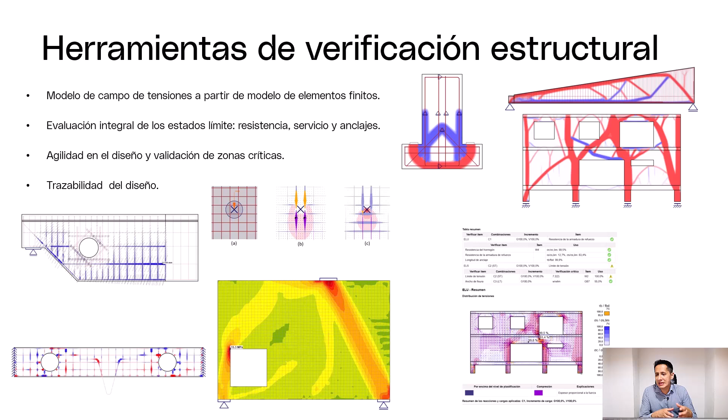Y bueno, en cuanto a la trazabilidad del diseño o la trazabilidad técnica, gracias a la representación más fiel del comportamiento estructural que estamos realizando, se podría incluso reducir el uso innecesario de acero, porque no sería tan conservador, por llamarlo de alguna manera. Podríamos mejorar la eficiencia constructiva y documentar cada verificación con los informes exportables que se van generando.

Y ya para cerrar mi parte, les presento esta tabla resumen en el cual compila todos los principales retos técnicos, los problemas comunes que enfrentamos en el diseño del prefabricado y cómo herramientas como IDEA StatiCa nos permiten resolver de forma precisa y alineada con la normativa.

En primer lugar, lo que habíamos comentado con respecto al tema de geometría, uno de los primeros problemas más comunes estaría relacionado al sobredimensionamiento, por ejemplo, o quizás a los errores no detectados por la falta de un modelo preciso. Mientras que con soluciones como IDEA StatiCa vamos a poder modelizar sin tener en cuenta estas limitaciones, y vamos a poder modelizar específicamente y validarlo con la normativa.

Por otro lado, otro punto importante tiene que ver con las condiciones de cargas especiales. Un problema común a presentarse es la subestimación de esfuerzos intermedios que permite riesgo de fisuraciones o fallos incluso dentro de los montajes. En cambio, con el software vamos a poder realizar un análisis más detallado por fases, con representación precisa de las cargas en general.

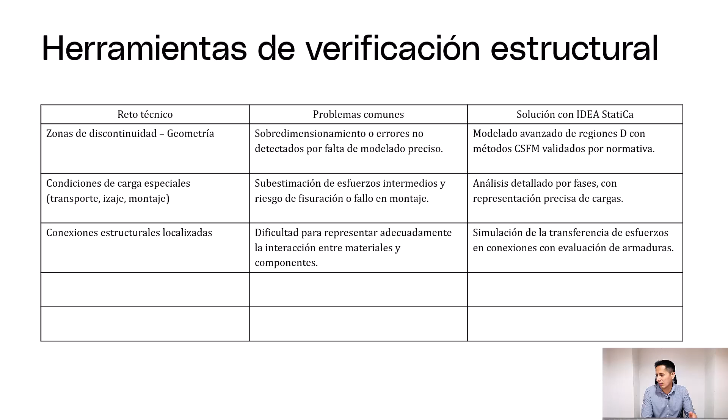Respecto a las conexiones estructurales localizadas, dentro de los principales errores comunes que podemos encontrar es que puede haber bastante dificultad para representar adecuadamente la interacción entre los materiales y los componentes de nuestra estructura. Un punto fuerte es poder simular la transferencia de esfuerzos en conexiones, evaluando las armaduras, el hormigón y el pretensado, específicamente con IDEA StatiCa.

Otro reto técnico tiene que ver con las limitaciones de herramientas genéricas. Esto se debe a que los modelos simplificados no nos permiten validar las fisuraciones, las deformaciones o anclajes en particular, mientras que con herramientas como IDEA StatiCa vamos a poder obtener el cálculo detallado de fisuraciones, flechas, tensiones, deformaciones, anclajes, entre otros.

Y por último, con respecto a la trazabilidad normativa y de validación, un problema común podría ser la justificación incompleta según normativa. Con herramientas como IDEA StatiCa, vamos a poder obtener informes según normativa y con gráficos, los cuales van a permitir que sean auditables por revisores externos de manera rápida y clara.

Bien, por mi parte esto sería todo. Ahora voy a darle el pase a Orsolya para que vean a detalle el cálculo con IDEA StatiCa.

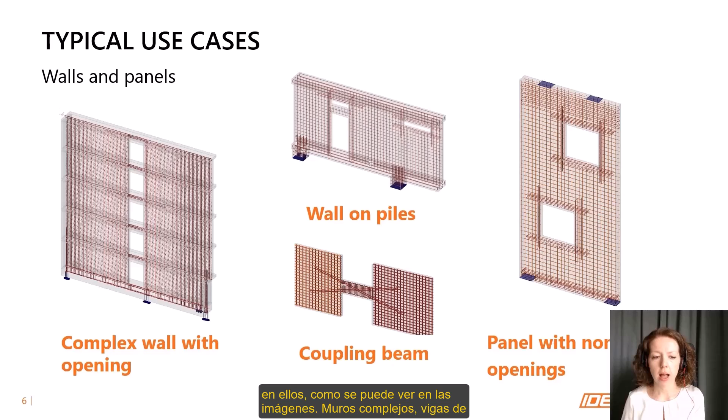StatiCa for concrete - what do we offer for concrete structural engineers? Some of the typical use cases that can be solved in StatiCa for concrete are walls and panels, even with complicated geometries and many openings in them, such as can be seen on the pictures. Complex walls, coupling beams, panels, walls on piles.

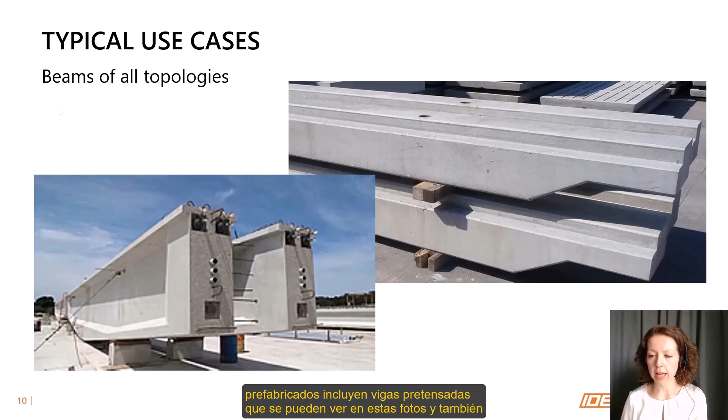And beams of all topologies, including discontinuities like dapped ends, openings, frame corners, deep beams, corbels, or beams with many openings, and even with pre-stressing, both pre-tensioning and post-tensioning. Some of the typical use cases for the precast industry include pre-stressed beams that can be seen on these photos, and we offer also a solution for bridge engineers - typical bridge details like pier caps, diaphragms, pile caps, deviators, and so on.

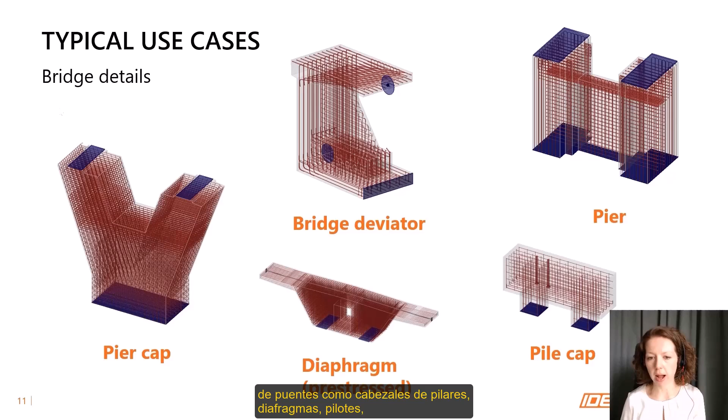So what are those discontinuity regions? Typically, structures can be divided into regions called B regions and D regions. The B regions are the simpler ones that can be solved by an experienced structural engineer, even by hand calculations or using some design book. The D regions, however, the regions of discontinuities, require a more special approach when it comes to calculations.

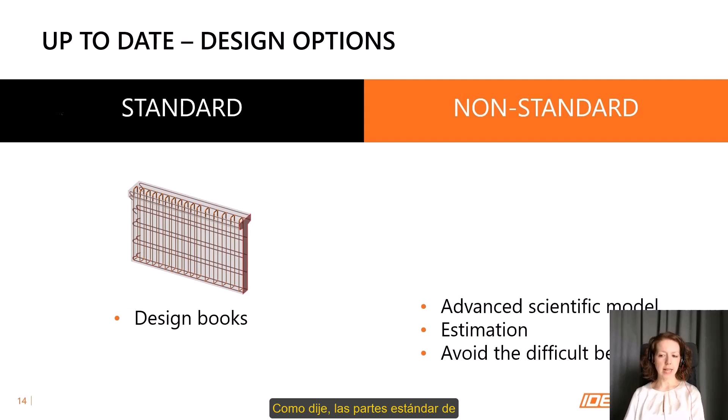As I said, the standard parts of structures can be solved even with the help of some design books or hand calculations. But the non-standard details many times require advanced scientific modeling, or the engineer has to use a lot of estimation, which can lead to over-designing and unnecessary material usage, or they can lose a lot of time during the design. As a result, they a lot of times avoid the difficult beam altogether.

Some available approaches to the design of D regions nowadays include linear analysis, which is available in most FEA softwares, but it is not the best solution for D region design. The strut and tie method is the most used method nowadays for D region design. It is simple, it can be solved even by hand calculation, but it requires an experienced engineer who is able to correctly create this strut and tie analogy, and it is also time consuming.

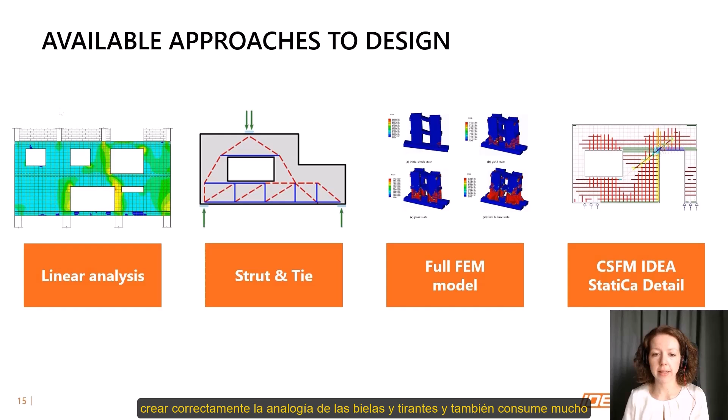There is also the option of full finite element analysis in advanced scientific computational tools such as Abaqus, but again it is really time consuming, and those softwares are not really for code checks, more like simulation and analysis of structures.

We at StatiCa offer a solution with the method CSFM implemented. The application is called StatiCa Detail, and I will talk about this one in this presentation.

StatiCa Detail with the method CSFM. What does CSFM stand for? It is the compatible stress field method, which is a nonlinear method for computer-aided stress field design that allows the automatic design and assessment of structural concrete members that are subjected to in-plane loading.

This method overcomes the simplifications and imperfections of the existing and well-known strut and tie method, such as the serviceability limit state checks that are not available in strut and tie, but are available in Detail.

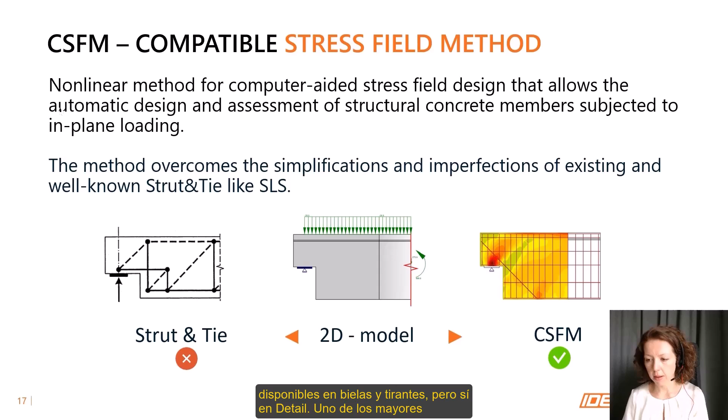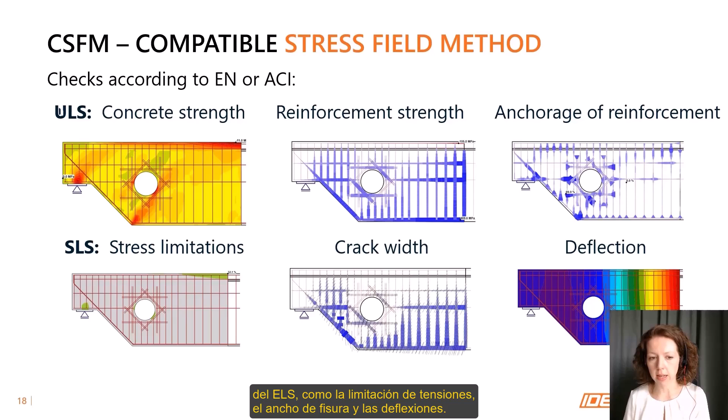One of the biggest strengths of this application, and also the method behind it, is that it offers complete code checks. Now the application is available for Eurocode, ACI, the American code, and also with the fresh new version, the Australian code. We have not only ultimate limit state checks, which are the concrete strength check, the reinforcement strength check, and the anchorage check, but also SLS checks like stress limitation, crack width, and deflections.

When I compare these two available and mostly used methods, the strut and tie and idea StatiCa Detail: on the left side, where is the strut and tie method, you can see that the compression is carried by concrete struts and the tension is carried by reinforcement ties. But this strut and tie model has to be created by the engineer, and it requires some experience so that the engineer can design the strut and tie analogy correctly.

However, in idea StatiCa Detail, the analysis is completely automatic. The results of the analysis are stress fields of concrete and stresses in reinforcement.

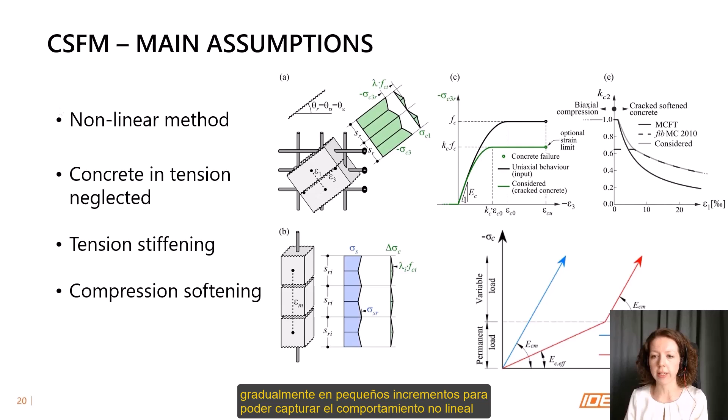The main assumptions of the method are: this is a nonlinear method. Concrete is neglected in tension. There is a tension stiffening effect of reinforcement implemented, and also a compression softening effect for concrete. Since it is a nonlinear method, each combination defined in the application needs to be calculated separately, and the load is applied onto the structure gradually in small increments so that we can capture the nonlinear behavior of the material.

Idea StatiCa Detail is a simple designing and checking tool. This tool was made by engineers, to engineers, with their everyday work and struggles in mind. This is not a scientific tool, but rather a designing and checking tool that can be used by engineers on an everyday basis. It offers a realistic model of the behavior of the cracked structure.

The code checks are available in Eurocode, ACI, and the Australian code, and the material models are also according to the codes. The checks are available for ultimate limit state and serviceability limit state.

Such softwares need to be, of course, verified and validated. The verifications were done in cooperation with the worldwide recognized research team of Professor Walter Kaufmann, who is working at the ETH University in Zurich, Switzerland.

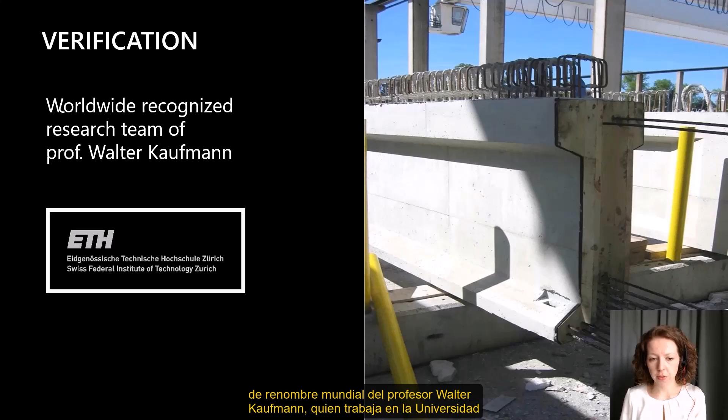The verifications were done on one side with comparison to scientific tools like Abaqus and ANSYS, which are computational tools, and also in comparison with real experiments. We compared the results of the application, results of scientific analysis tools, and also the results from real experiments from the laboratory.

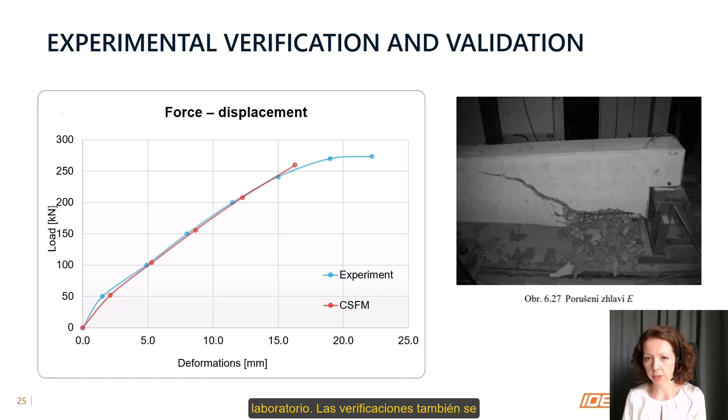The verifications were also published in a book from Professor Walter Kaufmann that is still available.

And now to the practical demonstration in the application. We will show how to design a pre-stressed beam with openings. It's going to be a 20-meter long beam with a haunched section which has 6 openings in it. It also has pre-tension tendons.

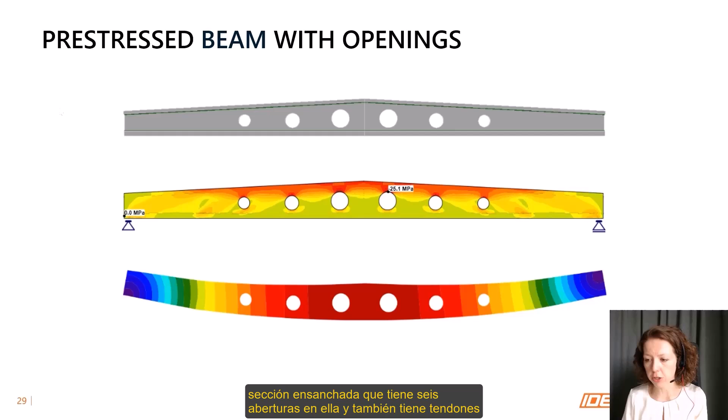So now we are in the environment of the software called Idea StatiCa, and I will open the detail application and select the 2D model type. We will work in a beam topology and select the predefined template, and the code will be Eurocode. Concrete will be C55/67, reinforcement B500B, and the concrete cover can be 30 millimeters.

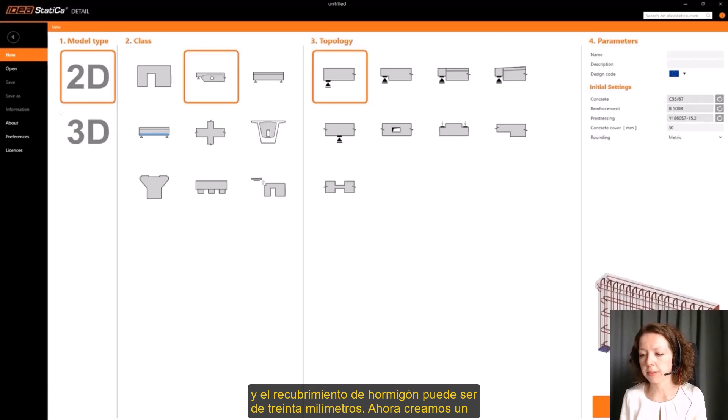Now we create a project, and we will modify this template to fit our project. The member M1 that is input into the template will be modified, a new cross-section with haunched flanges will be input, and the geometry can be modified in this window.

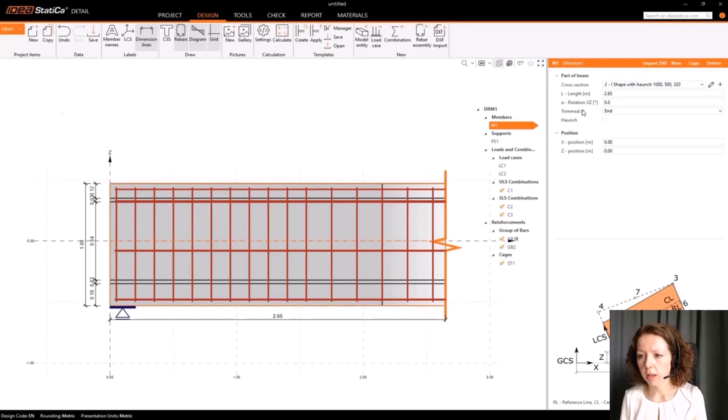We will turn off the trimmed end and turn on the option for a haunch. Now the cross-section of the haunch can be defined.

The original cross-section will be modified, so it will be a bit higher. And also the length of the beam will be changed to 10 meters, which is the half of the complete beam.

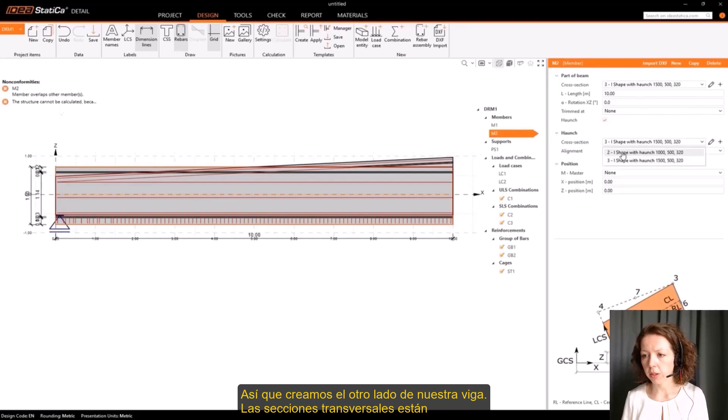And now we need to copy this beam and mirror it, so we create the other side of our beam. The cross sections are correctly assigned. And now the position has to be defined with a master member, which has master points and insert points. The geometry was correctly defined.

Now we will input openings. The openings will be circular, and the diameter and the position has to be defined here. The first will be 0.75 meter in diameter, and the master point is number 6, and the position will be defined using coordinates x and z.

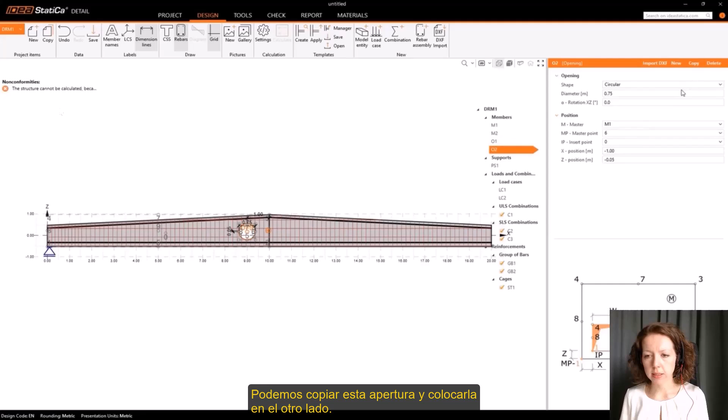We can copy this opening and place it on the other side, mirror it, copy it again, and change the diameter to 0.6 meters, and change the position. Copy it again, and copy that to the other side.

And now to the last two openings, which will have the diameter of 0.5 meters, and the position 5 and -5. So now we have 6 openings in total, which is the final count.

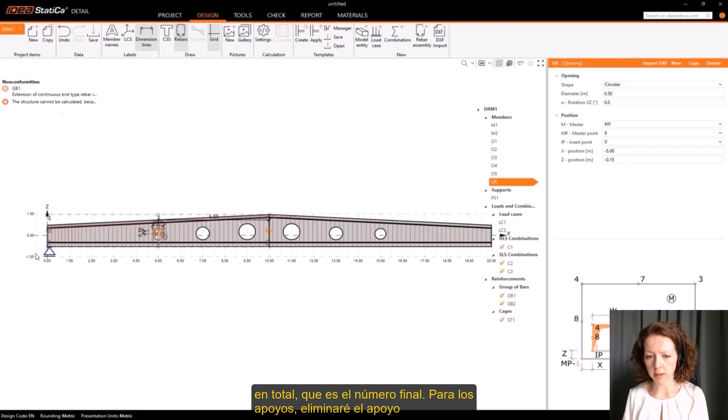For supports, I will delete the predefined support that was in the template and input new supports from model entities. It's going to be a point distributed support. The width will be 0.2 meters and it will be placed on M1 with the position 0.17 meters.

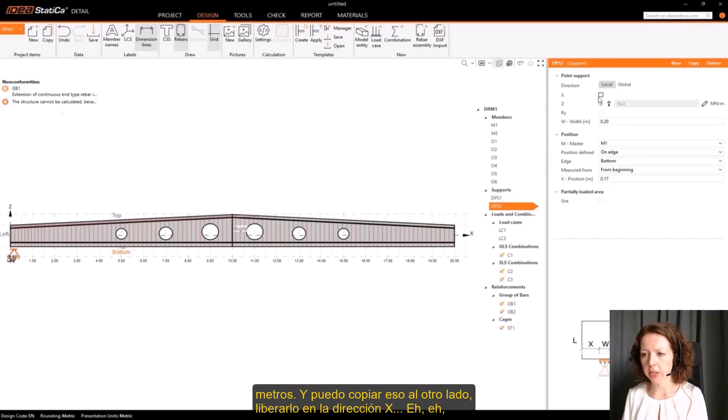And I can copy that to the other side, release it in the X direction, and place it on the M2 member from the end. Okay, now we have the structure supported. We can move on to the loads and combinations.

So some predefined load cases were created in the template. I will rename the first one to P, which stands for pre-stressing. We need to correctly assign the load case type.

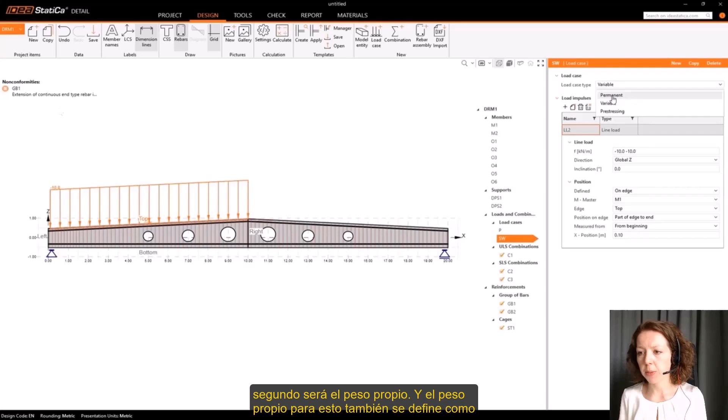The second will be the self-weight. And the self-weight will also be defined as a pre-stressing load case type, so this load case goes correctly into the combination. This applies for pre-stressed members.

So the pre-stressing and self-weight is applied in the calculation at the same time. So in total, we will have 4 load cases: pre-stressing, self-weight, permanent load case, and variable load case.

For combinations, we will use the predefined combinations. Open the combination editor, and we will have one ultimate limit state combination, one SLS combination that will be characteristic, and one quasi-permanent combination. And in this table, we can assign the correct combination factors for each load case.

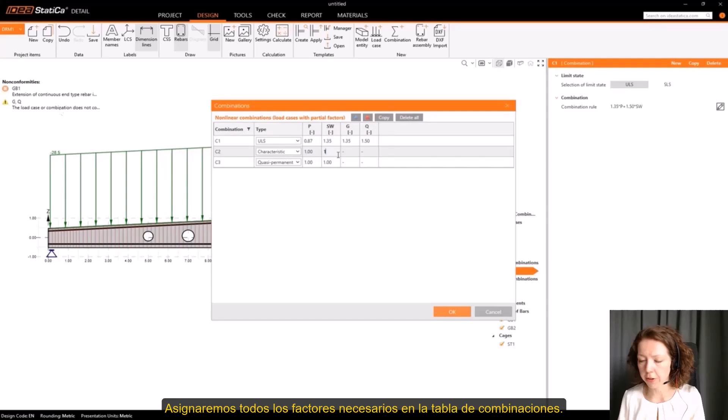So I will do just that, assign all the necessary factors into the combination table, 1 and 0.2.

Combinations are ready. For SLS combinations, we can use characteristic combination for deflection check and quasi-permanent combination for the crack width check. And combinations were correctly defined.

We will need to define the load impulses in load cases, so deleting the predefined load impulses and inputting new ones. The self-weight will be assigned into the self-weight load case.

And in the permanent load case, we will have 3 point loads on our beam with the intensity of minus 40 kilonewton in load case G.

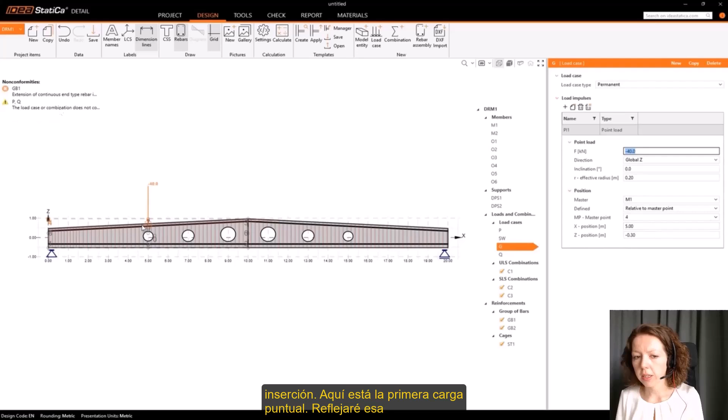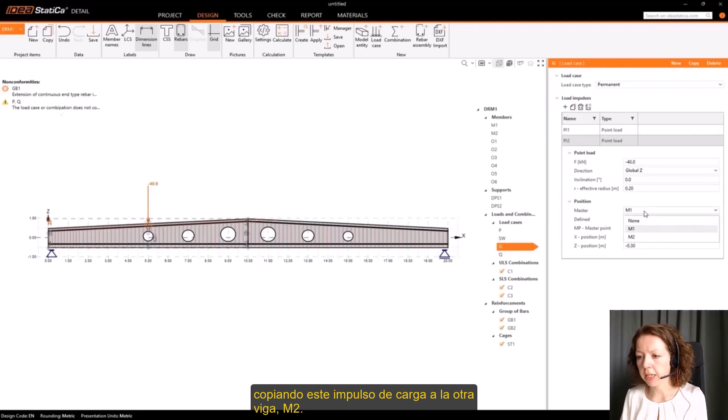Have to define a master point for the insert. Here is the first point load. I will mirror that one, copying this load impulse onto the other beam M2, and also insert a new one in the middle, which will be with 0 and 0 coordinates.

So now we have these 3 point loads, and we will input basically the same point loads, just with different values into the variable load case, defining the position, and this load case should be ready also.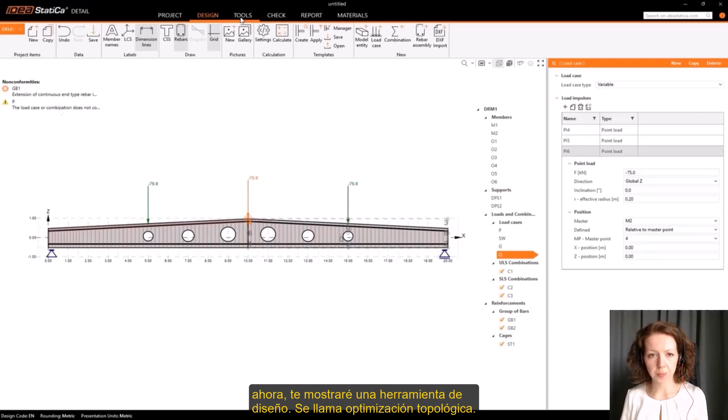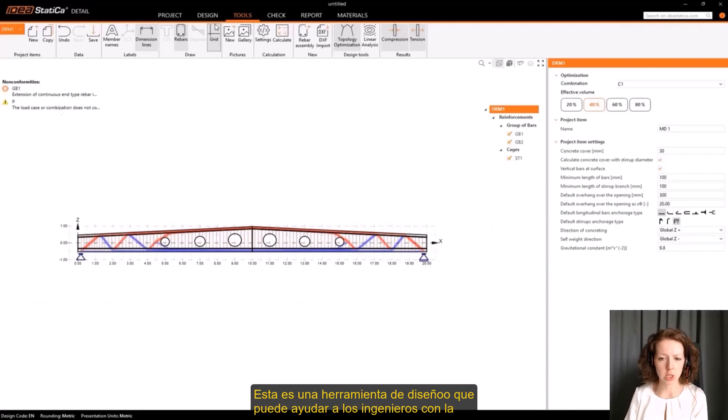So now I will show you a design tool. It's called topology optimization. This tool calculates where the compression fields and tension fields are in the structure based on the loading and based on the geometry of the structure. This is a design tool that can help the engineers with the placement of reinforcement.

I will edit the predefined reinforcement template starting with stirrups, editing the properties of the stirrup group and defining the spacing of stirrups.

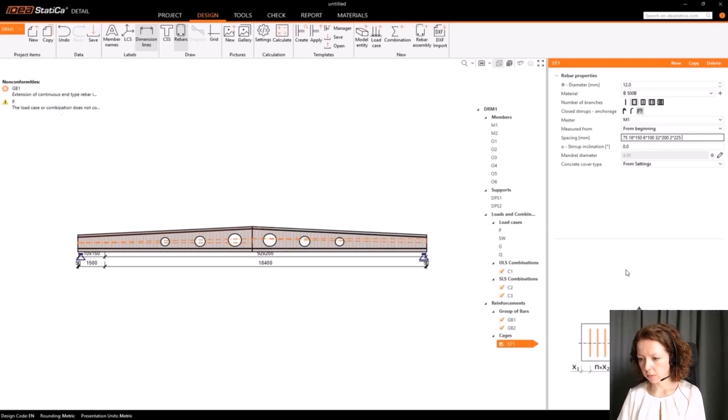So with this prescription, we define how the stirrups will be placed along the beam.

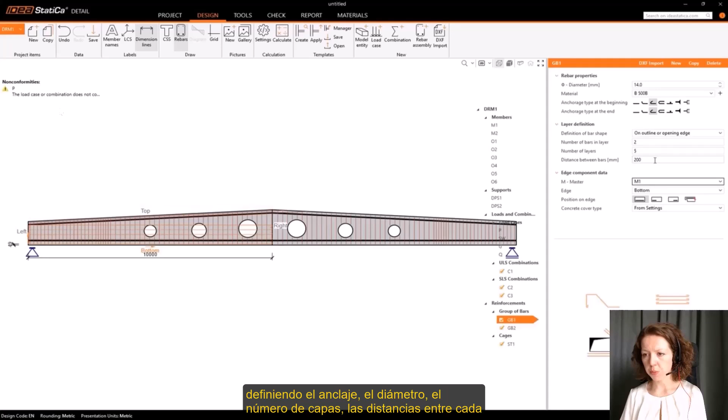Now moving on to the groups of bars that will be longitudinal in our beam, defining the anchorage, diameter, number of layers, the distances between each bar, and position.

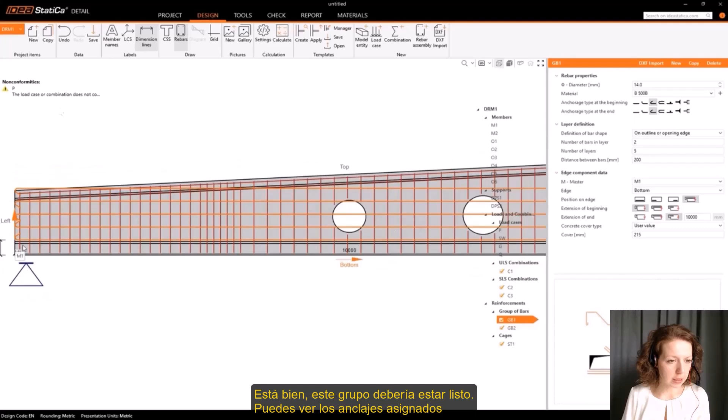Okay, this group should be ready. You can see the correctly assigned anchorages, and we can also switch to the 3D real view where we can check out our reinforcement, whether we input everything correctly.

Switching back to the two-dimensional view, I will continue to edit the next group of bars. Anchorage will be on the upper edge of our beam, just like that.

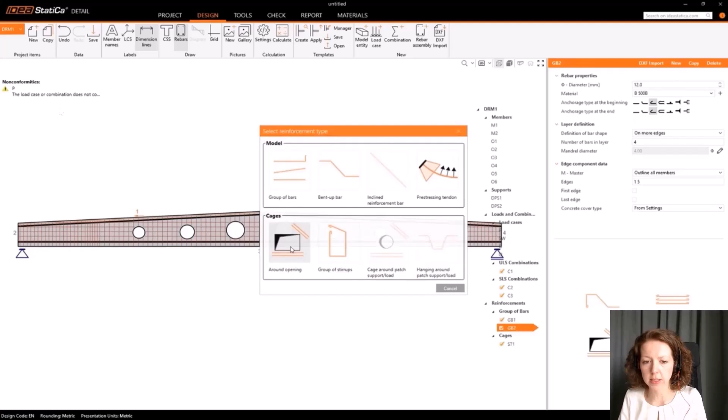Defining a new group of bars, we will reinforce the openings. We will input some reinforcement around the openings. Also, diagonal reinforcement is input automatically.

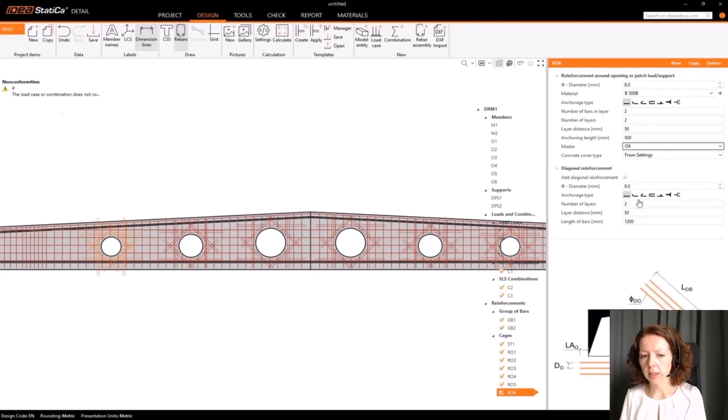And we can copy that to the other openings, O2, O3, O4. All 6 of the openings are now reinforced.

What is missing now is the pre-stressing tendons. So let's input some. We will define the material of the pre-stressing tendons, whether it is pre-tensioned or post-tensioned, and all the necessary properties. Material we will leave as predefined.

We will select the pre-tensioned tendons. Number of strands will be 4 in this layer, load case P, and the long-term losses will be estimated as 13% for the checks.

Definition will be by 2 points, on M1 and on M2. The stress will be 1,300 megapascals, and we will define the geometry.

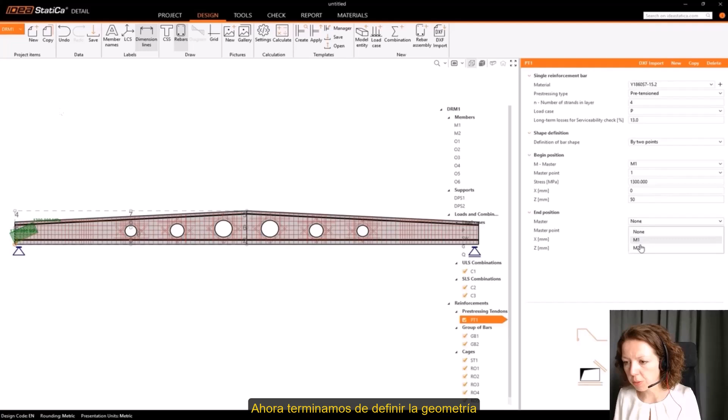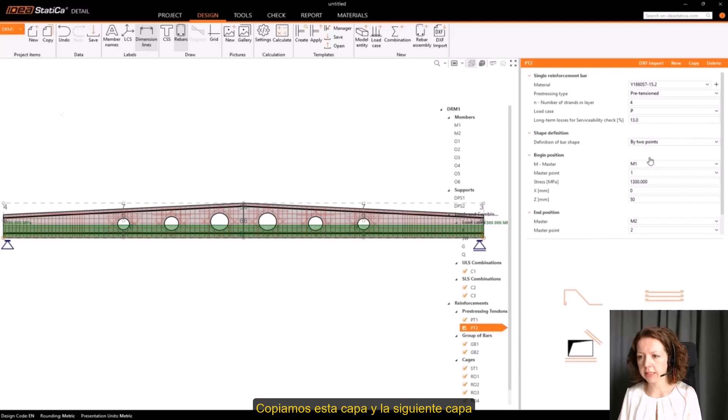Copying this layer, the next layer will have a blanketed length of 3 meters. So this is the way we input a blanketed length.

It will also be a little bit higher, so 100 millimeters from the bottom. And also copy that and create a third layer of pretension tendons. This layer will have only 2 strands, and the blanketed length will be a little bit longer again, 4.5 meters.

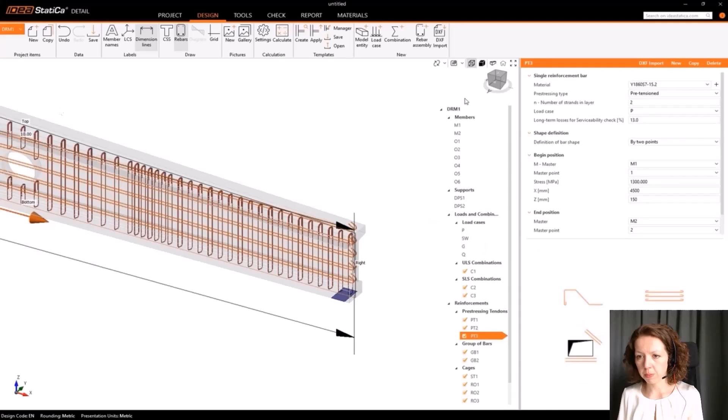Okay, so the pre-stressing tendon layout should be ready, and this is how they look in the structure. We can check it out in the 3D real view.

Switching back to the 2D, now we can run the calculation. This is a nonlinear calculation. We need to calculate every combination separately, applying the loads on the structure gradually.

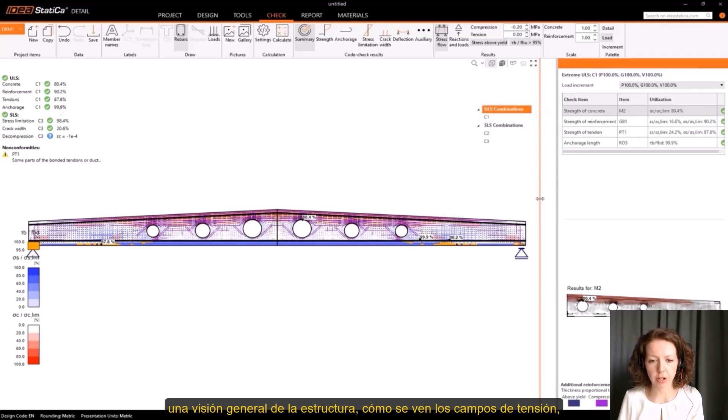Now we get the results. We can go to the check tab, where at first we see a summary of all results, an overlook on the structure, how the stress fields look, how the utilization looks like for concrete, for reinforcement, for anchorage.

This is what we see in the 2D scene. On the right side, we can check that 100% of load was applied on the structure, and on the left side, we see a summary of all the check results.

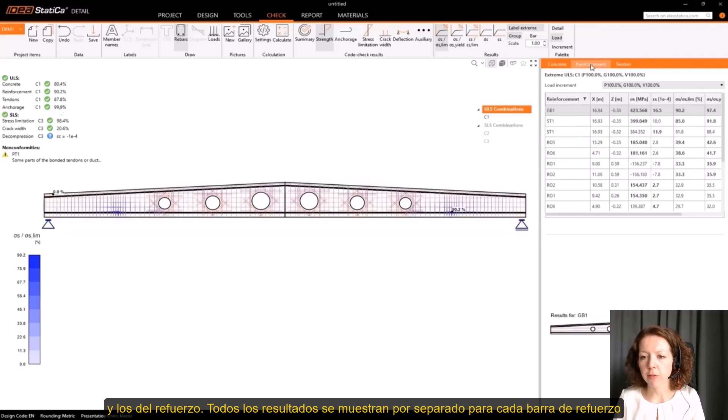We can go through the checks in detail. At first, in the strength tab, we can see the strength results for concrete and for reinforcement, all the results are displayed separately for individual rebars.

The utilization and also the stresses in the reinforcing bars, or the strains. This applies both for regular reinforcing steel and also for pre-stressing tendons.

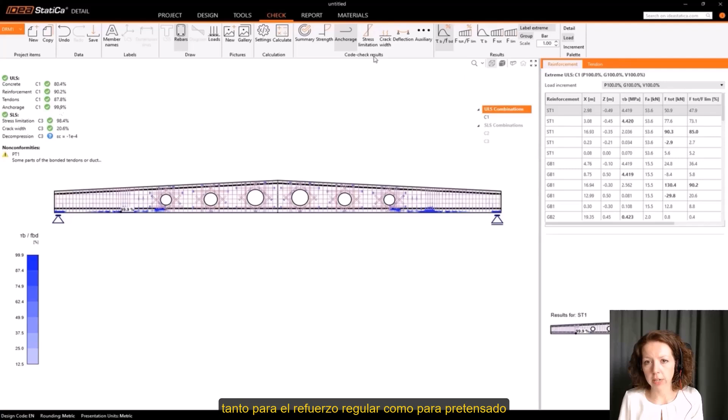So now we are in the ultimate limit state checks, and the last one of these checks is the anchorage check. We are checking every reinforcing bar for anchorage, both regular reinforcement and pre-stressing tendons.

So now we are moving on to the SLS checks. The first one is the stress limitation check. Here we are checking the concrete, the reinforcement, and the pre-stressing tendons for the stress limitation for SLS combinations.

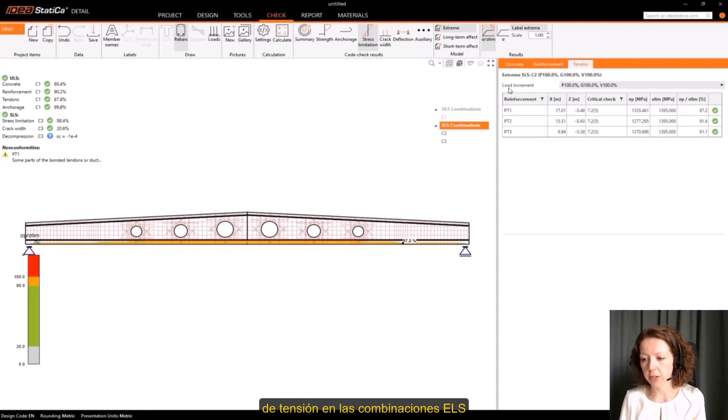And the crack width check, which was performed for the quasi-permanent combination, we display the crack spacing, where the cracks are appearing, the maximum crack width, which is compared with the limit crack width defined in the top ribbon.

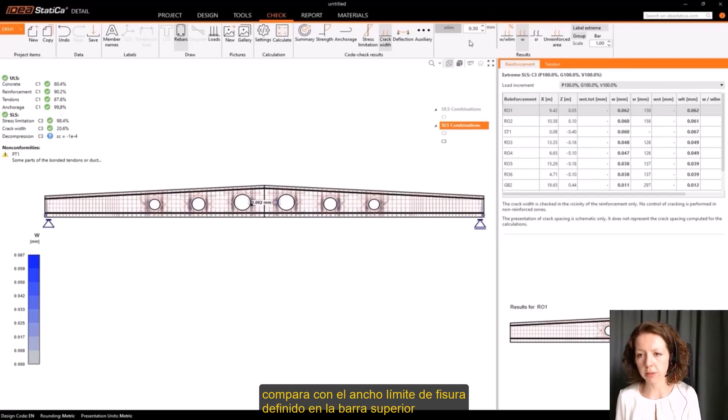And we are also checking the deflection of the structure, the deformations.

As the last step, we can move on to the report tab. We can generate a fully customizable report, and this report can be later saved in PDF or doc format.

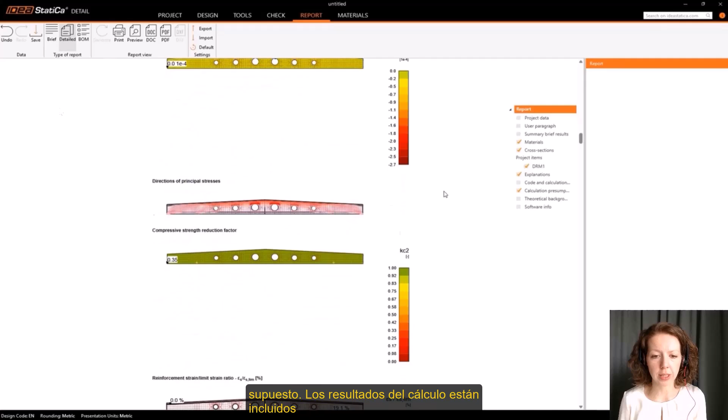We are displaying every important part of the project, such as reinforcement, project data, and of course the calculation results are included in the report.

After the results we will also see the bill of material with the reinforcing bars that were defined in the project. Detailed reinforcement bar tables are displayed here.

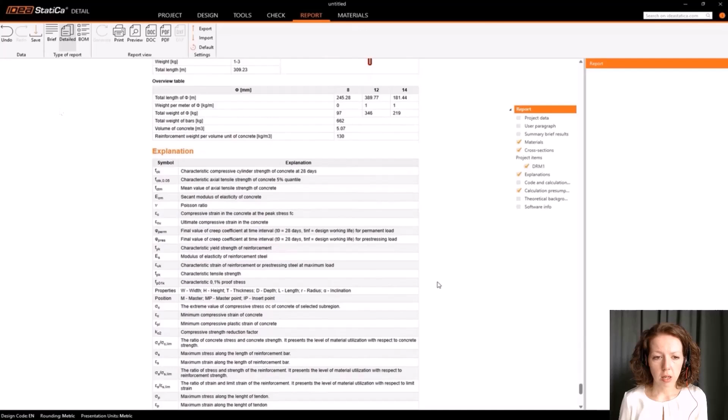And at the end, the explanation of all symbols that were used, and this report can be saved in PDF and doc format.

So that was for the practical demonstration part in the application. So now on to the next part.

I believe we also have some bridge engineers in the audience with us as well, and myself also being a former bridge design engineer, I just could not resist the chance to include at least a couple bridge projects into this webinar. I will not model these examples from scratch, but I will show you at least how they look like in the application.

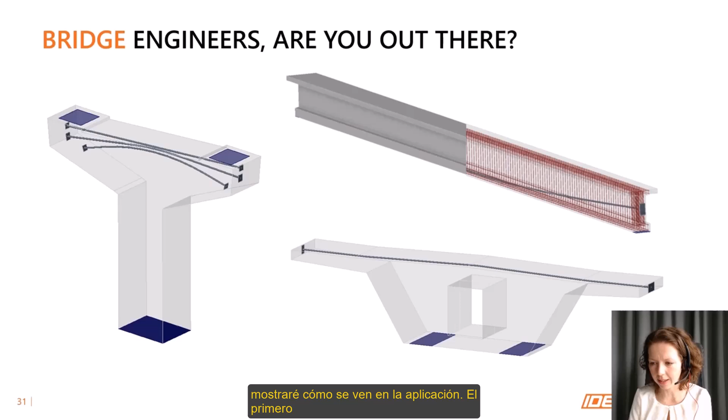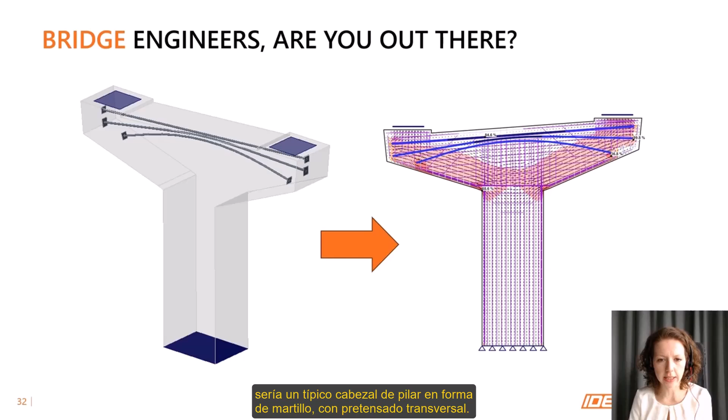The first one would be a typical hammerhead pier cap with transverse pre-stressing. At first we can take a look at the 3D view of the geometry of the pier cap and check out also the reinforcement, the rebars.

I would highlight the option for the DXF import, which is possible for both the geometry of the structure and the reinforcement, the rebars. So any changes in the project can be made really quickly. You can import the DXF file of the reinforcement, or even the whole geometry can be imported through DXF.

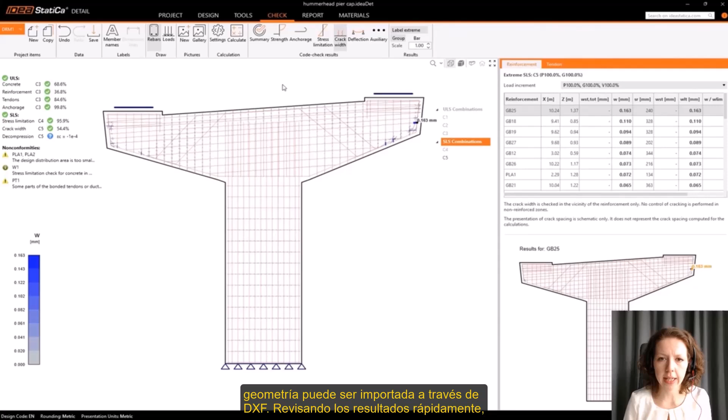Going through the results really quickly, checking out the crack width, where the extreme cracks are forming, and also let's check out the deflection and the deformed shape of the structure.

So the next project, this is a typical bridge girder with post-tensioning. Similarly to the pre-stressed beam that I showed you in the modeling part, which was a building structure, bridge girders can be modeled as well, and they can include pre-tensioning and post-tensioning as well.

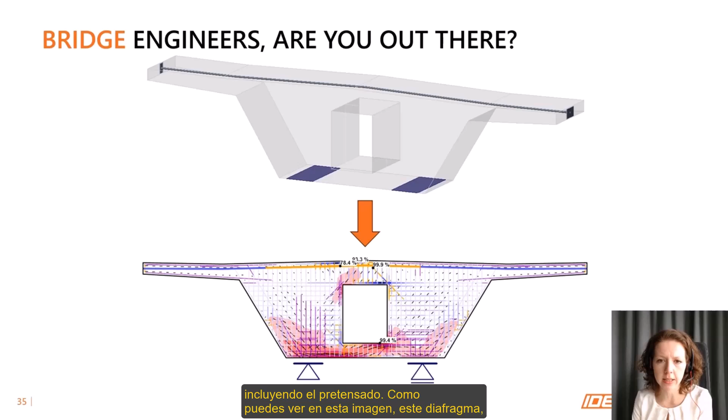Also, diaphragms of bridges can be analyzed, including pre-stressing. As you can see on this picture, this diaphragm is with transverse pre-stressing.

And we can check out the rebars. This diaphragm is reinforced pretty thoroughly, as it is typical for such bridge details.

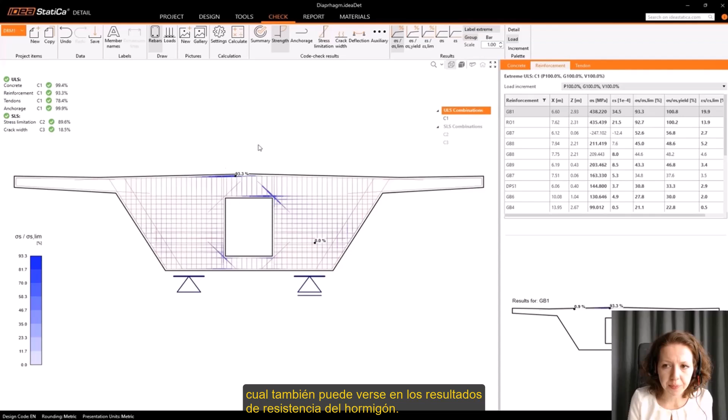And we can check out the results and see how the stress is flowing beautifully in the structure, which can be seen also on the concrete strength results, checking out the reinforcement results and the tendon results, how the deflection looks like, and the deformed shape of the structure.

What I wanted to share, we definitely did not stop at the two-dimensional development of Idea StatiCa Detail. After the success of this two-dimensional module that was for the wall element and for all the structural details that are subject to in-plane loading, we continued with the development of the application, and we entered the third-dimensional module.

We are developing three-dimensional concrete blocks that can be checked and analyzed, including the reinforcement defined in the concrete block.

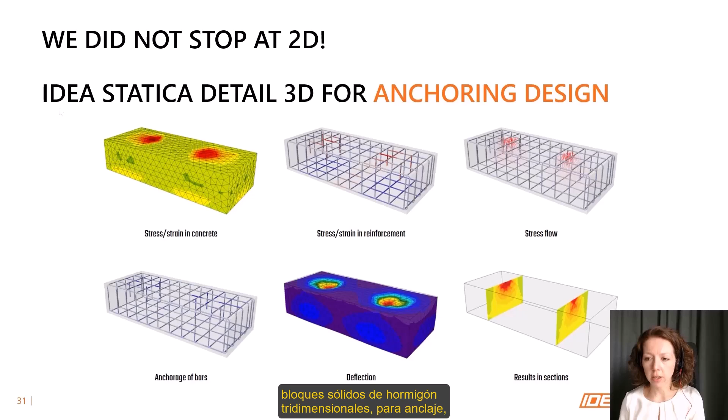The first released and verified use case that we are now offering to the engineering public is the anchoring design, where we are able to check 3D concrete solid blocks for anchoring, including the defined reinforcement inside.

Where is it useful? When you have anchoring near the edges, or anchoring with more base plates into one concrete block that are interacting with each other, or heavy anchorings with shear locks, or even anchorings into reinforced walls.

And it is important to mention that these concrete blocks are checked, including the reinforcement bars that are defined in the block, and the placement of the reinforcement is not limited. So the engineers are able to input reinforcement bars as the project demands.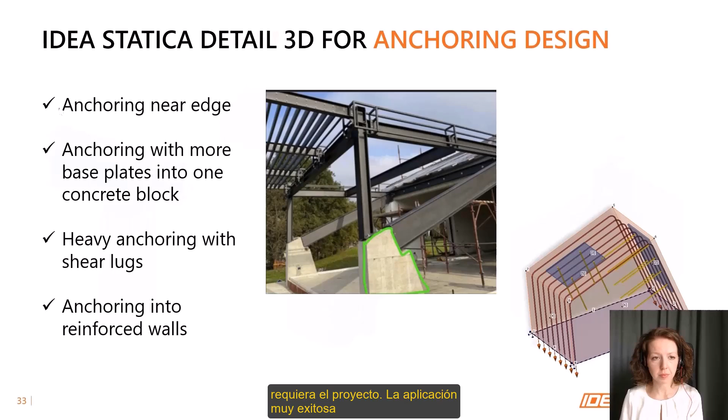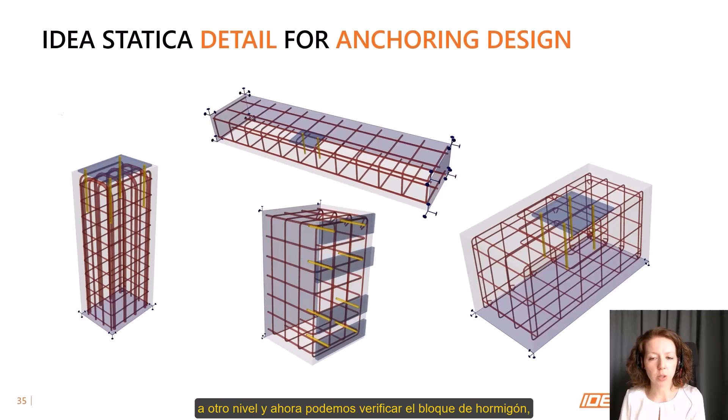The very successful application called Idea StatiCa Connection already had the anchorage checks available, but the concrete block was considered as plain cracked concrete. And now with the 3D solution in detail, we took this to a next level, and we are now able to check the concrete block, also including the reinforcement bars.

And these two applications are connected with each other, so when an engineer defines and analyzes an anchoring use case in the connection application, they can import it into the detail application, reinforce the concrete block, and check the concrete block, including the reinforcement.

And a little glimpse into the future, the 3D development didn't stop at the anchoring. Our goal is to analyze and check general three-dimensional discontinuity regions, such as pile caps, anchoring of pre-stressing steel, diaphragms, and all kinds of three-dimensional discontinuity regions.

So there is a lot to look forward to. Development and verifications are already on the way.

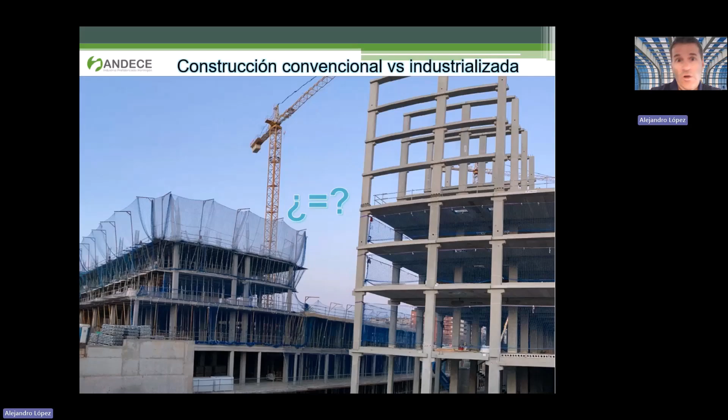Todo esto tiene que ir muy ligado de manera secuencial desde esa fase de concepción, de definición de los elementos, que es donde los software que CONSTRUSOFT comercializa, y hoy va a ser uno de ellos el que presente, vayan luego interconectados con el resto de fases. Véase la fabricación en primer lugar, incluso la logística y por último la ejecución.

Asimismo, creo que es importante también destacar que en este momento de cambio, no solamente esa transformación digital la están acometiendo las empresas, casi diría que la sociedad en su conjunto. El hecho es que hoy estamos aquí llevando a cabo un webinar y nos permite estar comunicados a distancia. Bueno, en este caso, también la sostenibilidad diría que es la otra gran vía que está transformando la construcción actual.

En este sentido, en Andece llevamos trabajando en esta línea durante más de 10 años para tratar de facilitar a nuestras empresas asociadas esta transición. El mercado, la reglamentación cada vez demanda más soluciones sostenibles, y esto no es solamente cumplir con un parámetro, sino tener una visión mucho más de conjunto, mucho más holística, teniendo en cuenta entre otros factores, los materiales con los que

trabajamos, el cemento, los áridos, los aditivos, las fibras, el acero, etcétera, y medirse, es decir, saber los impactos ambientales que tenemos para, a partir de ahí, empezar a ponderar, valorar distintas medidas que nos permitan ir reduciendo paulatinamente nuestros impactos ambientales.

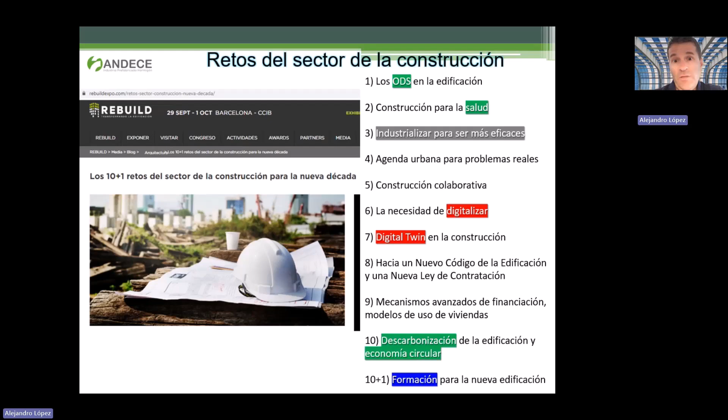Esto guarda una relación, diría que directa, también con toda esta transformación digital. El hecho de que cada vez los software sean una herramienta crucial para poder diseñar y fabricar posteriormente, también implica que los programas de cálculo sean sensibles a todos estos cambios, en la medida que no hay medida más sostenible que hacer un uso racional y responsable de los materiales que tenemos, es decir, ir a soluciones cada vez más eficientes, más diáfanas. En este sentido creo que la industrialización en su conjunto, y más en particular los elementos prefabricados de hormigón destinados a todo tipo de estructuras, tanto en edificio como en infraestructuras de obra civil, tienen mucho que decir.

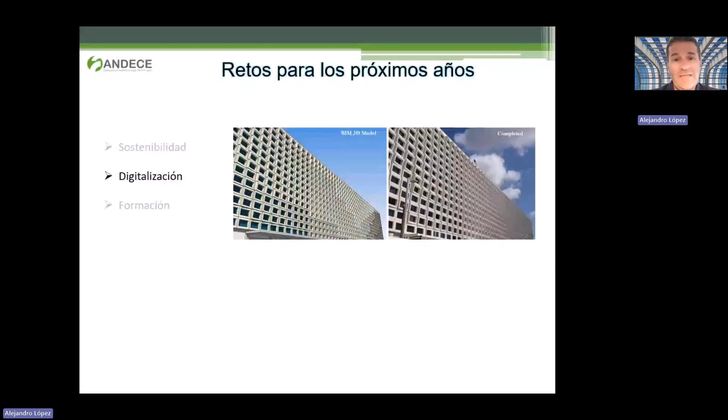Y volviendo al tema central del webinar, la digitalización, tenemos claro que la metodología BIM está en el centro de atención de esta transformación. Desde hace ya más de 10 años en Andece hemos ido trabajando de manera intensa con distintas acciones divulgativas, como pueden ser el desarrollo de un catálogo de elementos prefabricados de hormigón genéricos modelizados en BIM. Con CONSTRUSOFT hemos tenido en más ocasiones, tanto en webinars como en jornadas técnicas, oportunidad de dialogar y de ir presentando todos los avances que se producían en este sentido.

Y aquí, una vez más, cabe destacar que esta transformación, esta necesaria transformación digital que tenemos que acometer, la industrialización, la construcción industrializada, se aviene mucho mejor en la medida de que los elementos, en este caso prefabricados de hormigón, deben definirse de manera inequívoca durante la fase de diseño, es decir, tanto en geometría como posición espacial que tendrá que ocupar posteriormente en la obra, como en características técnicas. Forma parte de todo el contenido informativo que tiene que tener cualquier objeto BIM.

Y en este sentido, los software, como es el caso de Tekla u otros que comercializa CONSTRUSOFT, y también con el aprendizaje mutuo que ha habido con empresas asociadas que utilizan las licencias de los programas de CONSTRUSOFT desde hace muchos años, esto nos ha permitido avanzar y tener ya, o poder afirmar, de una manera convincente, que ha habido un avance notable, y es que esto ha supuesto una mejora en cuanto al conocimiento, el control de cualquier parámetro, desde la fase de diseño hasta cuando el elemento ya llega a la obra y se coloca.

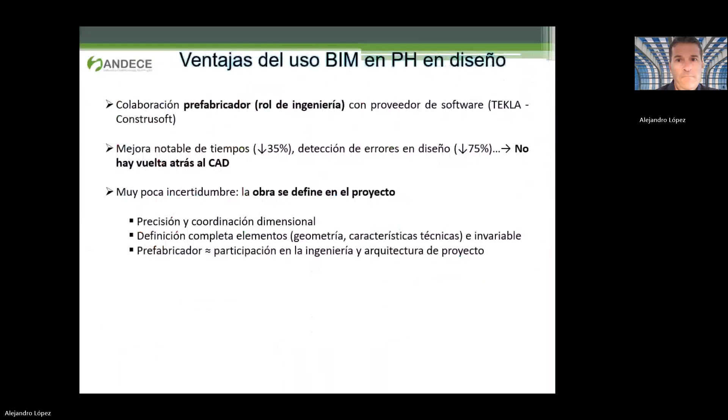Y para concluir mi parte, creo que también es importante destacar el plan BIM, que entró en vigor en abril de 2024. Un plan que establece una serie de exigencias que irán incrementándose paulatinamente en los próximos años.